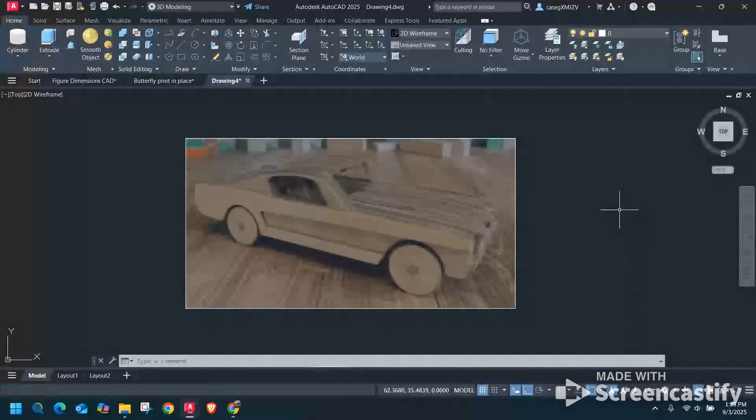Okay, so when you decide on your design, look at it and evaluate it and decide how you're going to create it. You don't have to use every element that's in the design, but you want the overall look. So I'm going to take this profile and I scaled this image after I went to my insert and attach. I scaled the image to be 6 units, 6 inches is what I have it at, but 6 units in length. I don't want my car to be longer than that, and I want my width around like 2.5, 3 inches in width.

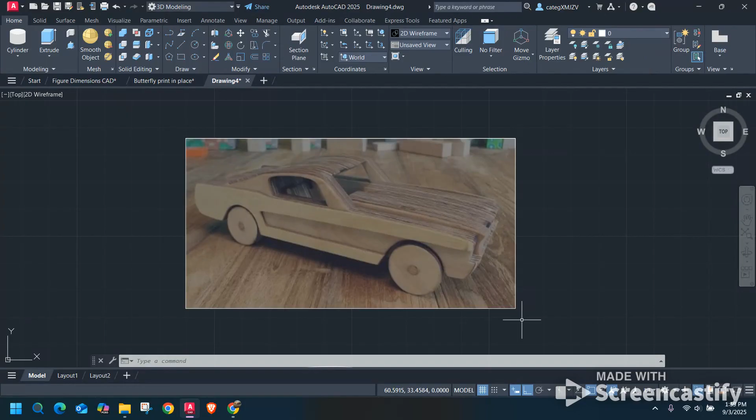If you look at a standard Matchbox car or a toy car, typically you have that foundation. So I started out by just recreating that profile. Now, this is an isometric view, yes. However, you can just extrapolate where you want your pieces to be. I'm extrapolating how far this wheel is back from the front and how far this piece is from the fender, okay? Now, again, this is your interpretation. It's okay to be a little bit different about it. It doesn't matter, but what you need to be doing is utilizing your tools to create it.

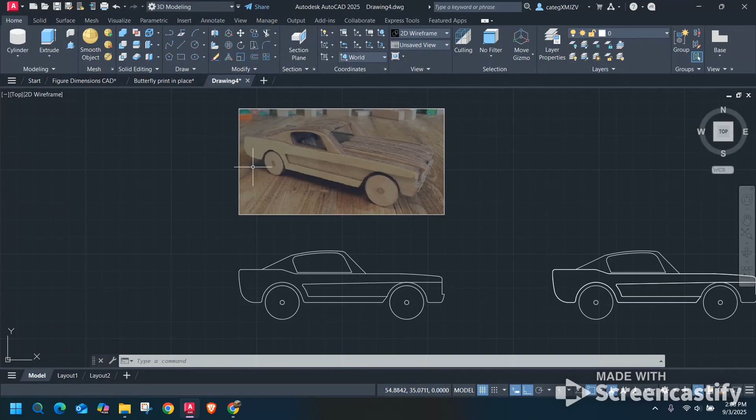So you'll go and just outline it. Now, what I ended up doing was deciding where I wanted the base to be, where I wanted the wheels to lay out in a very simple grid-like fashion that you can go ahead and change as it becomes more and more prevalent in the design. So say these are off a little bit, you can shift them forward or back, making sure your isometric is on until they actually align with how you want it to lay out.

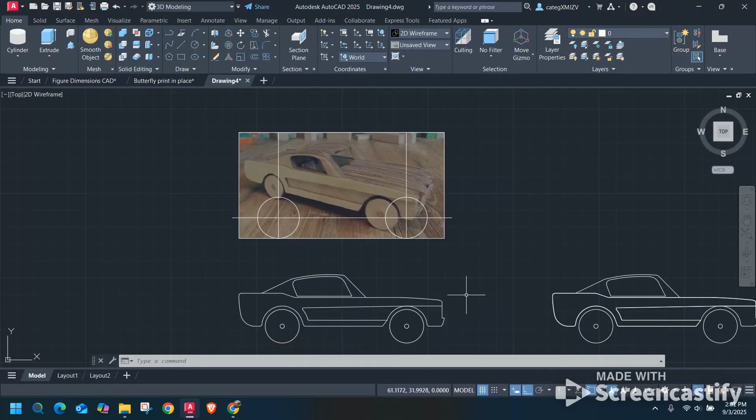Then what I would do and what I did was start with your wheels. So you'll go ahead and you'll start with your wheels first, and then you have a basis to create this opening in the car body, and you can just do that with an offset. Just make the decision on how far out you want that to be, remembering that you're in a 6 by 2.5 body, okay? Also, you need to know the size of your axle, right? So mine is rather small. I just used a dowel. You can use a metal piece. It really just depends on what you have, but you're going to need that to develop your car.

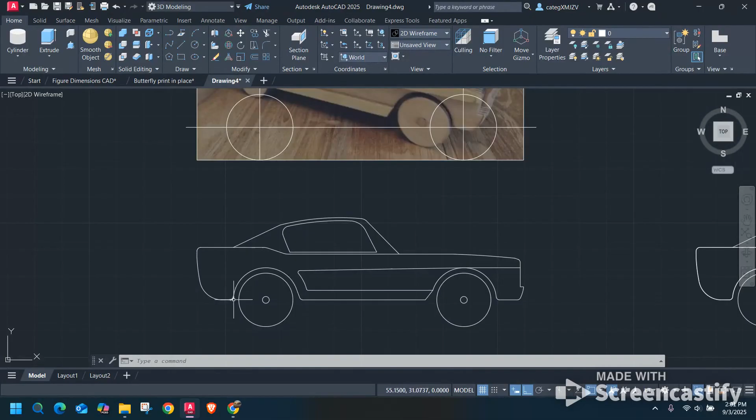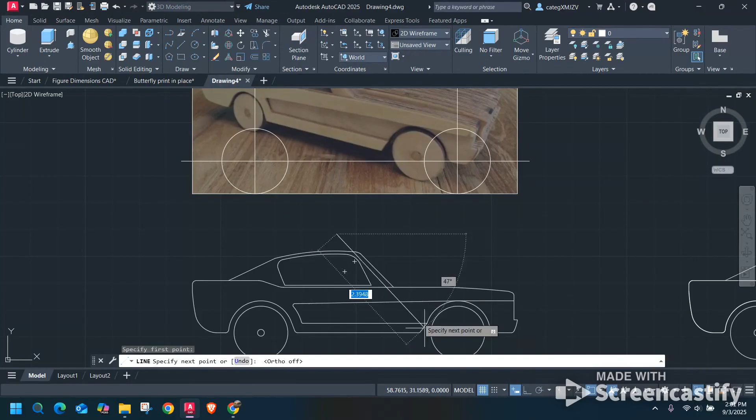So I did most of this with lines and grid work. I did some fillets in here, some offsets. This is just an offset to recreate this portion of the body. If you can see here, it actually does come off of the body a little bit, and I decided to keep that intact. I also wanted this opening to remain intact, so I did create the window. Now, I did that as an offset, but I also decided that I wasn't sure exactly how I wanted the windows to be, so I played with it. I played with the angles. So just go ahead and decide how you want it to look, but use larger lines to set up how it's going to be and how it's going to lay out, and then trim it out. And then once you trim it out, you'll fillet it.

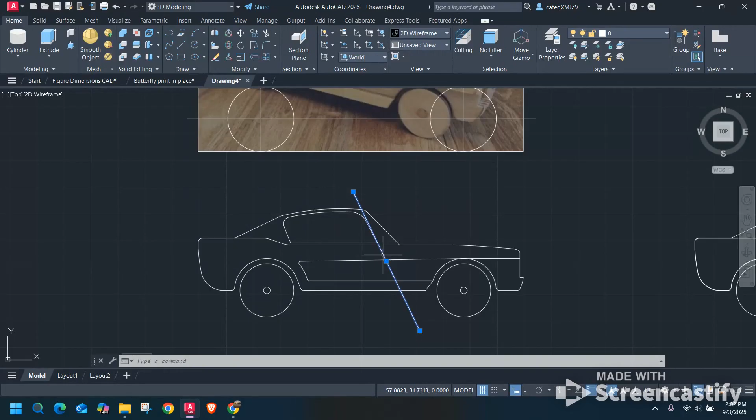So this was originally an offset of this upper piece here, and then I created another line similar to this one back here, okay? Which can just be a simple copy if you want it to be, okay? And then this is, okay, it's not quite where I want it to be, so I'm gonna shift it, okay? Then make your box. This down here is another offset. So slowly but surely your body will come into view. Now you need to make sure that it's joined. You need to make sure you're using your snaps, or you won't be able to press pull it.

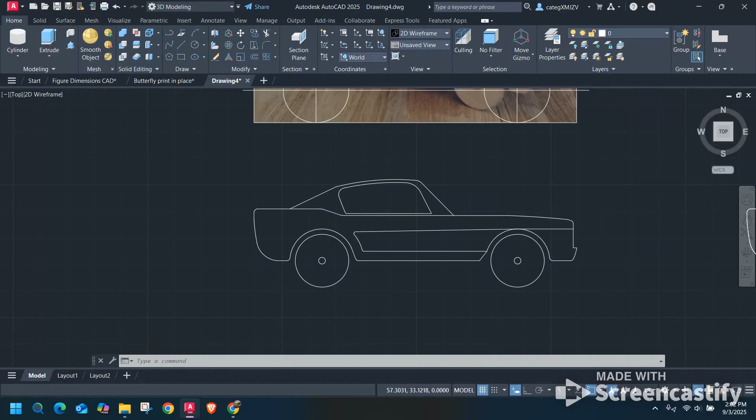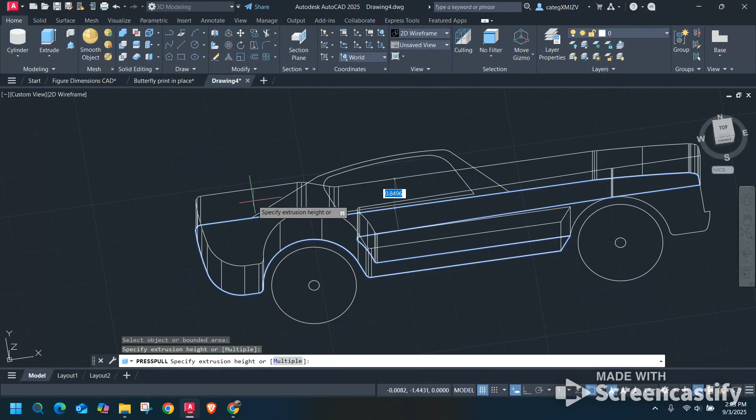So if I do want this outline to be above the main body, I'm going to need to presspull that. So what you're going to do is you're going to press pull this shape. Okay, just go to your press pull and decide how big it's going to be, right? So it's not large, it's very thin. So go ahead and decide if you're going to want it at 0.125. That gives you a little bit of lip, but maybe not too much, okay? So play with it. This is a jumping off point for the design.

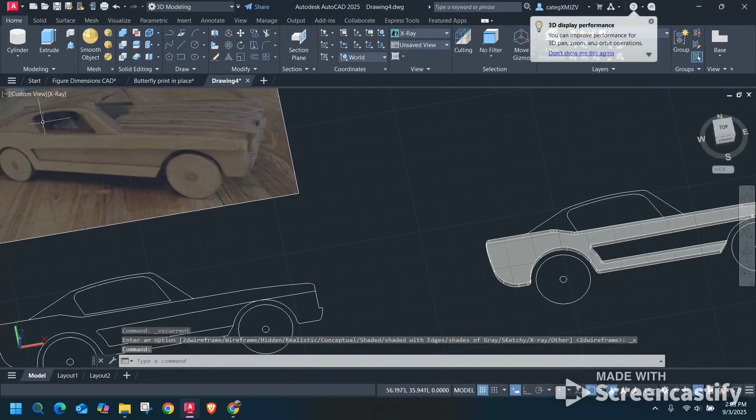So here you have the actual outline of this portion created, right? So I created it, and then I changed and made some little fillets. I can come back later and fillet this all out so it's not a sharp edge for printing. That would look nice. That would develop it a little bit better. But I'm going to leave this here. And then what I decided to do was go ahead and copy my outline so that I could create the body.

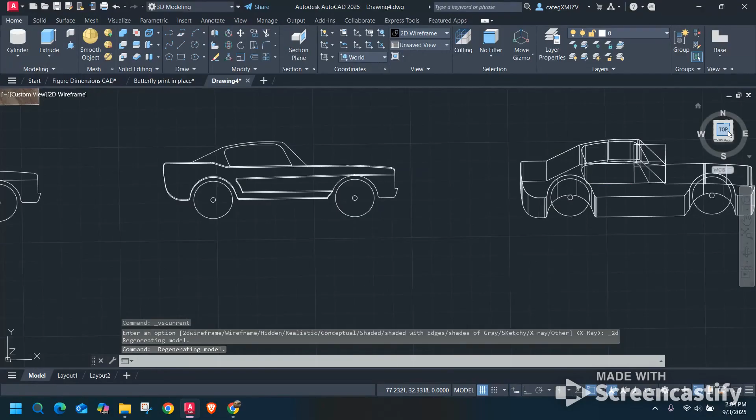Okay, so if we look at this, here's my body. This has now been left over here, and I just took the body with the wheels. So this will be an opening, and I'm going to go ahead and press pull this. Now I press pulled it 2.5 inches, but I went down.

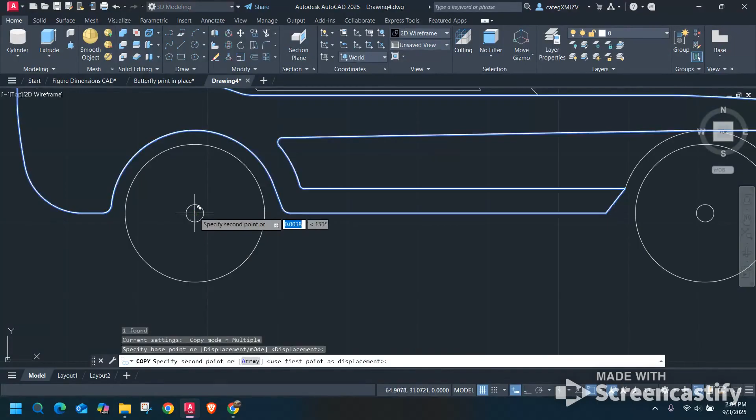So if I look at it from the side, you'll see that this piece is above the plane and this is below the plane. So it'll make it easier for me later when I want to place it on top of it. So if I wanted to do that now, I would select this, copy it. I would use a consistent point of attachment. So I would say maybe the center of this wheel, and then use the center of the wheel I have here. And if I look at it, you can see that it's above the other, okay?

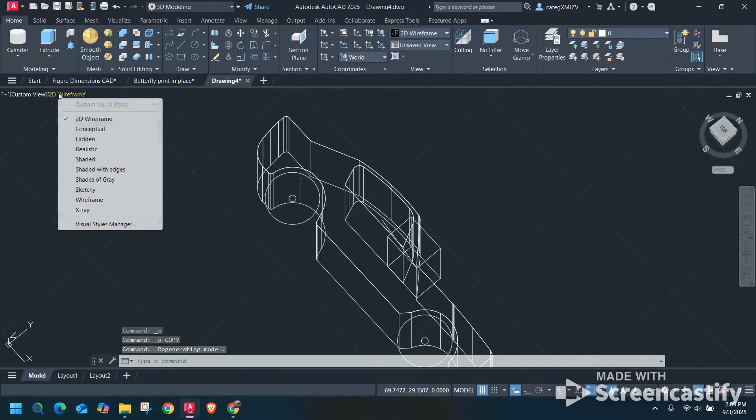I'm not gonna do that right now because I wanna mess with this a little bit more, okay? So we'll go back to where we were before. Now, if you look at this, it has the hole here, but it will not have the hole in the windshield per se. So what you're gonna wanna do is you're gonna make that opening. Now, because we already created this, we don't need to worry about that.

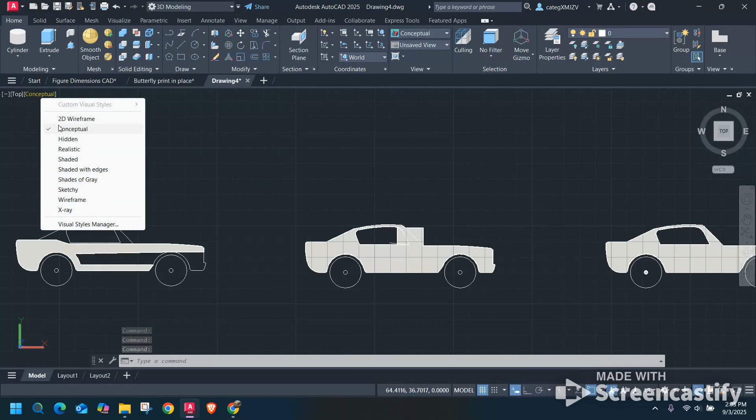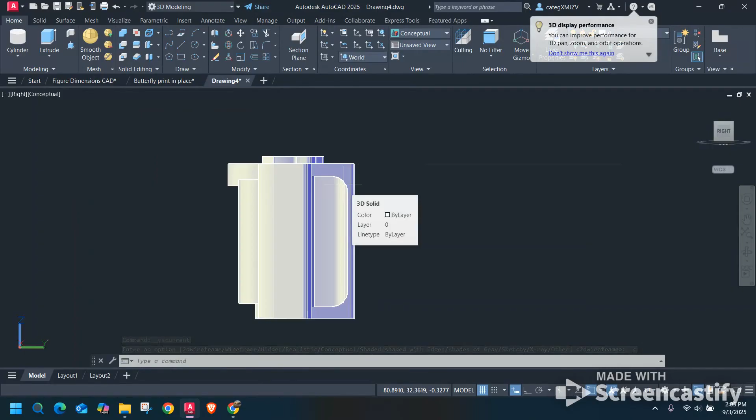However, if you make it with a rectangle, it's going to eat into this doorway because this is not a straight line. So the easiest way to manage it is make your rectangle, decide on where it's going to align with the body. You can see it here. I actually filleted my edges because I didn't want it straight. It does not need to happen that way. I just did it.

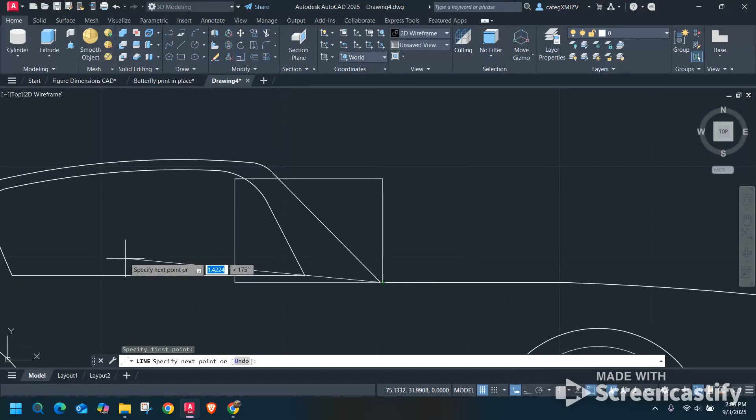And then I'm gonna look at it straight on from the side. And I'm gonna put it back in wireframe to make my life easier. And then I'm gonna decide where I want this sliced. So I'm gonna take a line, I'm gonna stick it down here, and then I don't want it to cut into the hole I created, so I'm gonna kind of bring this line aligned with this little corner piece.

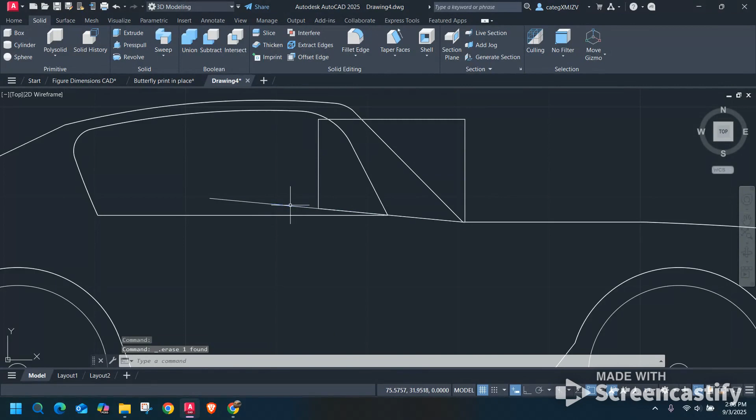Then remember, slice: go to solid, go slice, the solid box, and then pick your plane that you're slicing along. Make sure you get this corner or it's gonna be weird, okay? So then this should be its own entity and it can go away. Now what that's gonna allow me to do is subtract this and create the hole for the windshield. So subtract, I want this piece and I want this piece gone. So now I should have a hole if I look at it in conceptual, okay?

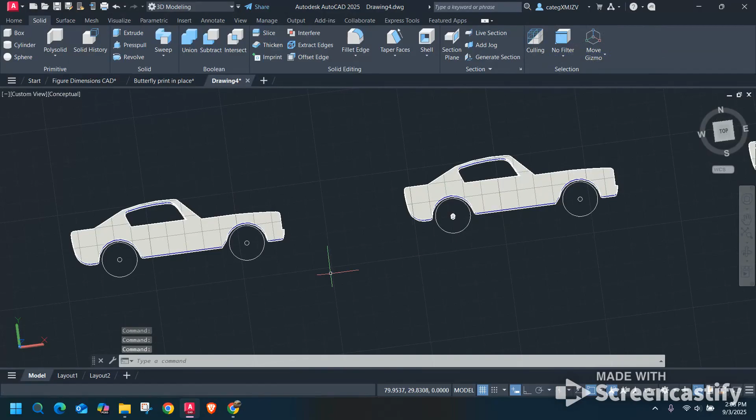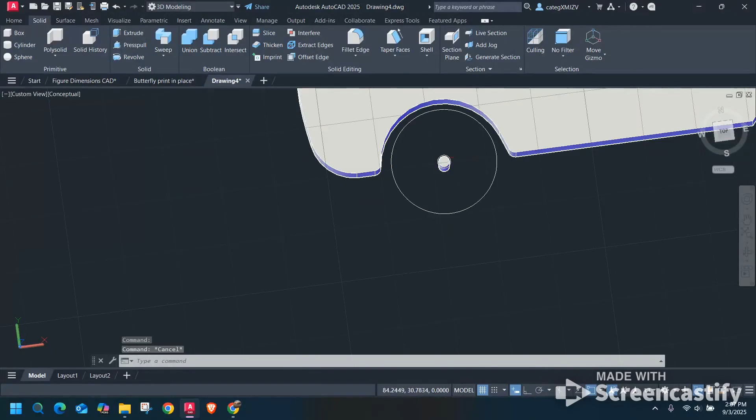Now, I want, before I move forward, to have my axle created. So I'm gonna go ahead and make my axle. The thing about it is, it can't be the same exact size as the hole in the wheel. So go ahead and offset it. You're gonna want your tolerance to be between 0.02 to 0.05. So I'll have that and it'll hang out here for when I need it later, okay?

So the next thing you're gonna do is make the wheels. And I made the wheels without this hole. The reason I did that is because I'm going to turn it later and delete that opening, but I don't want the hole, I want it to look like a solid piece in my wheel. Now, if you want yours to go all the way through and you're gonna put a pin to lock it in place instead of glue, that's fine, you can totally do that. So you would just create your axle and it would come all the way through the wheel and then you would have the hole.

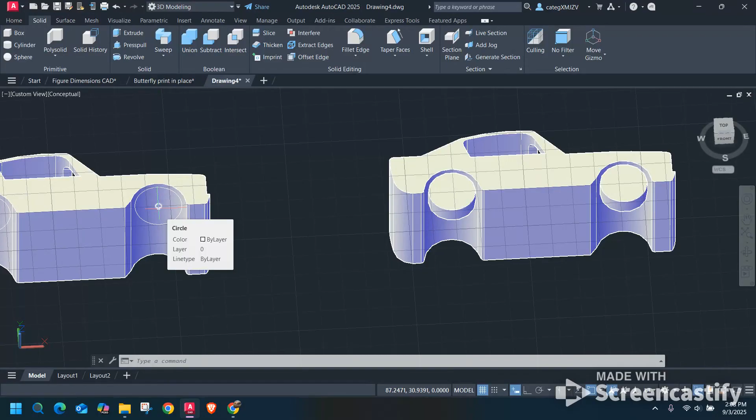So at this stage, I have my body, I have the outline detail, and I have my wheels. Now, with the wheels and the outline, I can flip those with mirror to the sides I want them to be on as an eventuality, okay?

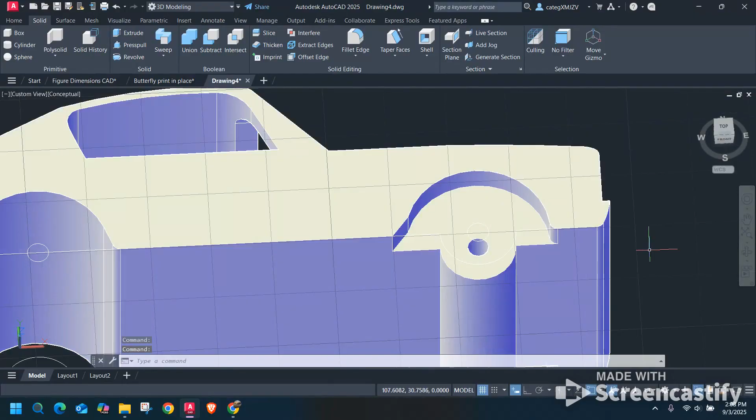So the next thing you need to work on is creating the wheel well, okay? So it needs to be deep enough that your wheel will not interfere with this opening. And remember, if I'm not happy with its depth, I can always use my press pull and push it in. That is not a problem, okay? So I went with 2. The whole body is 2.5. I'm gonna have it at 2. Does it work? You have to look and see if it interferes later on.

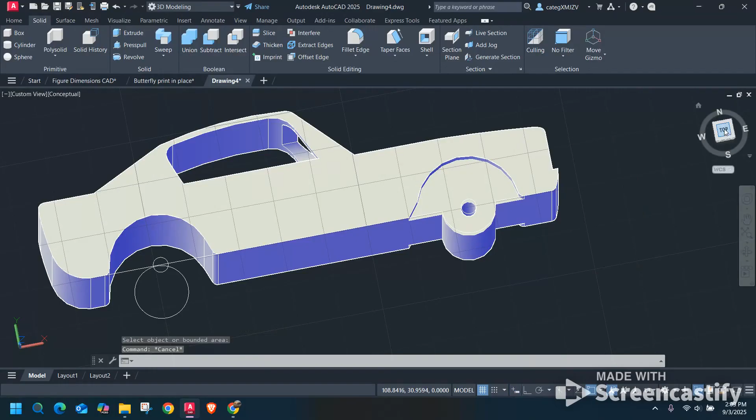So how I created this portion was I just snapped a line across this body to cover the opening. And then I decided on how much of the axle I wanted to have embedded. So I didn't want a flimsy piece of the body surrounding the axle, so I made it a little bit larger. You don't have to. You can go ahead and fillet this and make it a little more attractive. I just left it as a circle with those sharp angles.

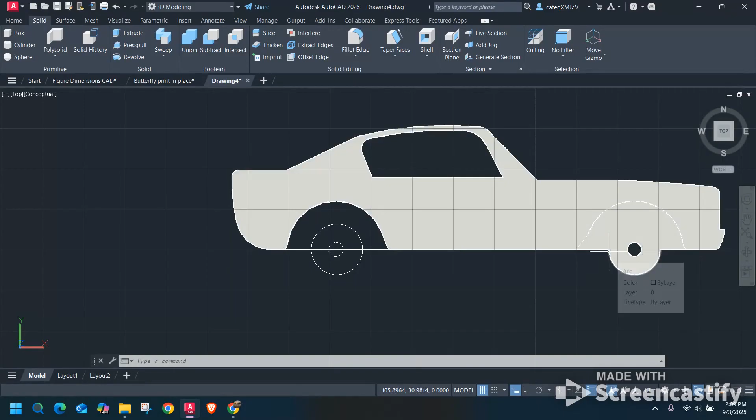So all you have to do is, once you've done your offset for where the axle is going to go through, so remember, you have the hole in the wheel, you have the axle a little bit smaller than the hole, so you can slide it into the hole of the wheel, and then the axle has to slide through this portion of the body so it will rotate freely.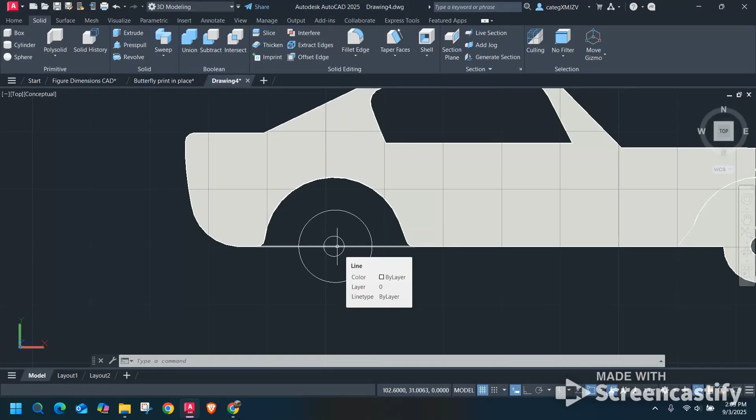So you're going to have to offset that original diameter by enough that you'll be able to slide the axle through. So I would lean towards the larger of the tolerances, maybe 0.05 or bigger, so that it goes all the way through. Now you can always do test pieces to make sure of what you're doing. Once I have all of these pieces in place, I'm just going to trim this out.

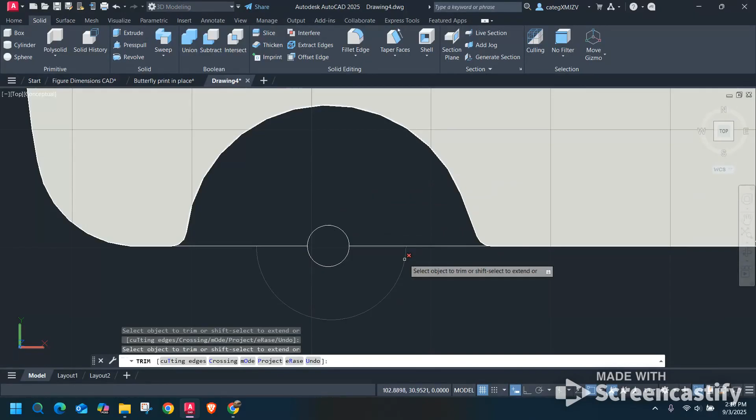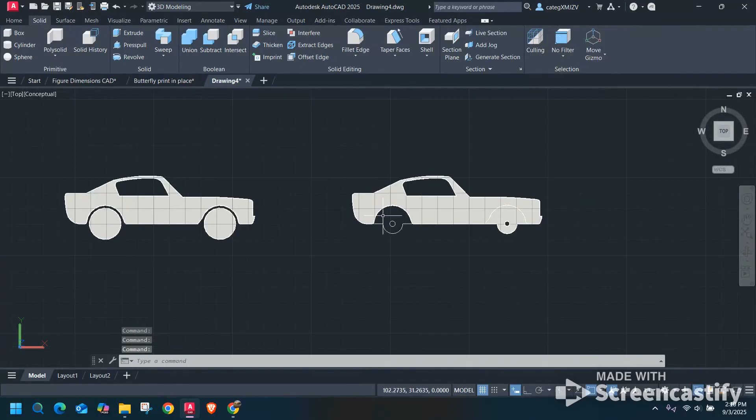That and that. Okay, so it looks kind of similar, and you'll just press pull it. It should grab it. Sometimes, oh, look at that. This is not on the right spot, so just go ahead and move it. Happens to everyone. There. Hopefully this will work out fine here. And now when I hit press pull, hopefully it grabs it, okay? And I want it to go this way, 2.5.

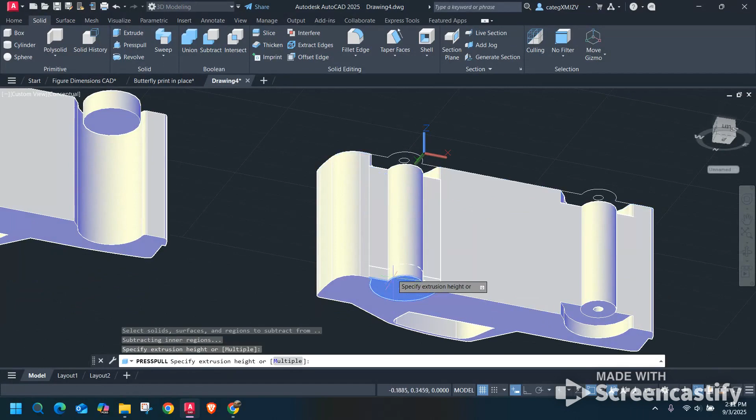And then I'm going to push this in the 0.25 and 0.25. Oops. I think my body is 2.5, so I needed this to be 2, not 2.5 like I made it originally. Okay, so now I have pretty much my body the way I want it to be. If you notice, once I create it, you're gonna have to union it if you want to do any filleting to the edges or any details like that. So go ahead and union it once you have that body in place, okay?

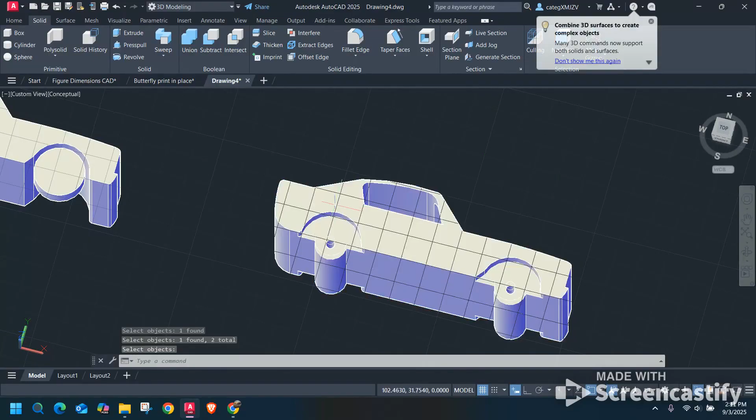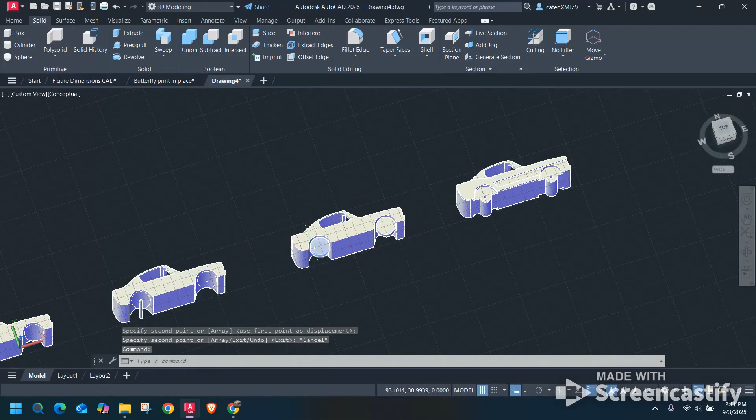So now, you still have a center point for that circle. So if you want to go ahead and put this onto your body, you should be able to if you made it correctly. Now, holding my breath and hoping that I did it right. Okay, and then the wheels should be the same. They should have the same location. I'll put it here, where they set there, okay?

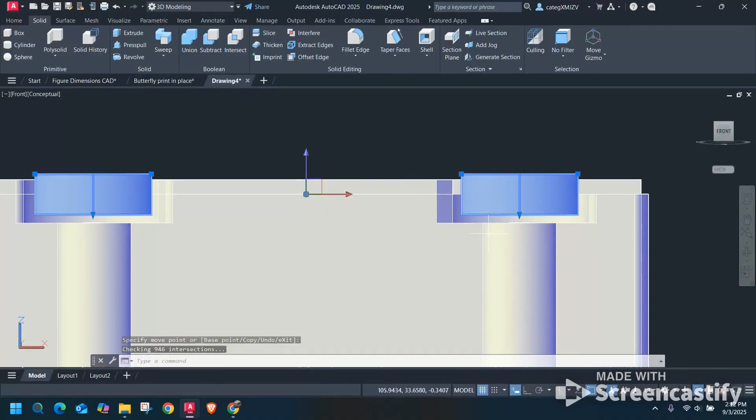Now, one thing is, did I make them too thick? And I did. So let's not do that. We want both of these to pull out from the body. And actually, I guess they're not too thick. I just placed them on the wrong circle. So I'm going to have mine protrude just a little bit from the body. You may need to put in a little separator piece here if you want. I don't want any friction, so I'm going to leave them like that. Okay.

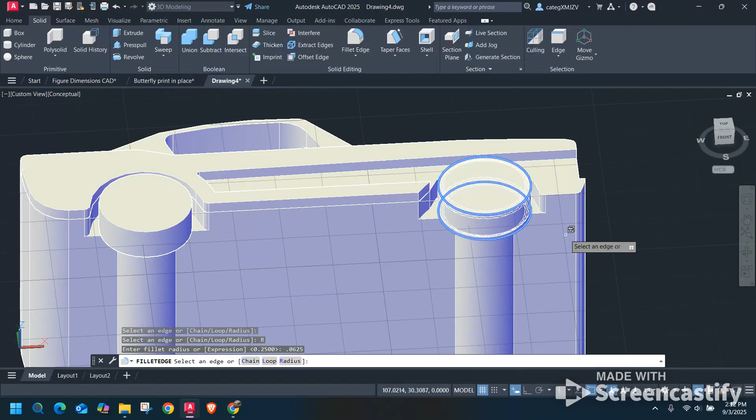Now, maybe we should go ahead and fillet our edges. Okay, that's obviously way too big. You can see that. So just remember, press your down arrow and change the radius. It'll tell you what it is. So maybe we try 1/8. Okay, and if we like that, we can put it on both. Now make these changes before you do your mirror.

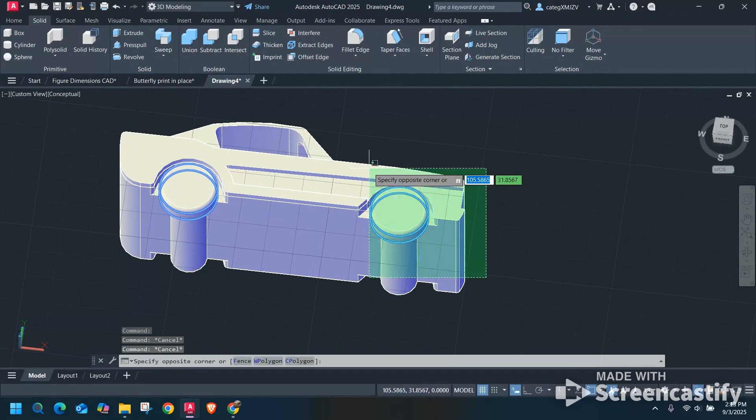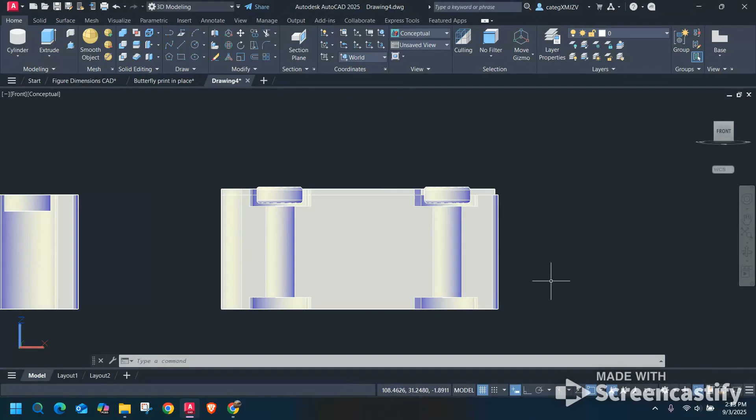Okay. Now, the next thing you want to do is bring this piece and these pieces over, okay, to the other side. So if I select all of these, I look at it from the front, I can't just move it. I want them perfectly placed. So what you're going to have to do is go back home and go to your coordinates and place it on the plane you want to flip it with. Go ahead and change the view. Select everything that's going to move with it.

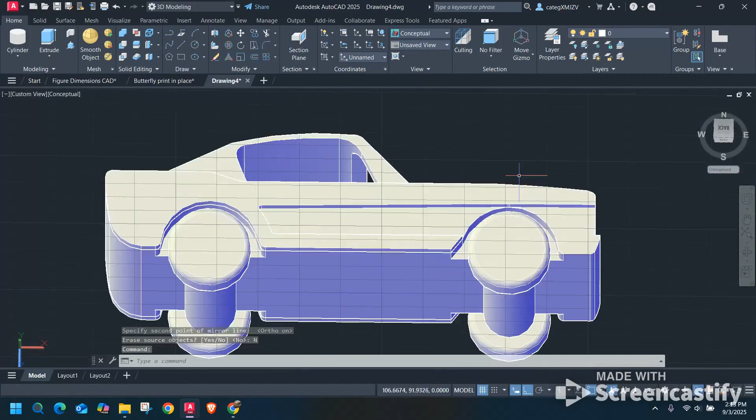Okay. Mirror and find your midpoint. Put on ortho and say no to erasing. So now you should really have your body, okay, and your wheels. And when you go to print this, you're going to want your pieces unioned. So hold on.

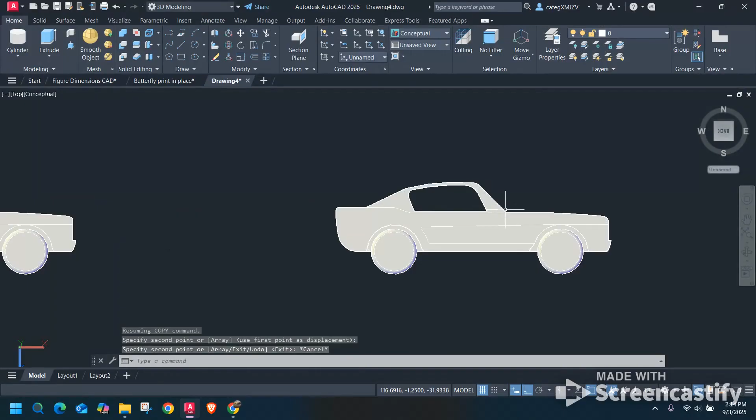A lot of times when I create, I have multiple copies, because I might not realize something I've done is going to inhibit the overall design until after I've already done it and it's saved, and I didn't print it. I didn't do what I needed to do with it, and now I'm kind of stuck. I don't want to be stuck. I want it to be created.

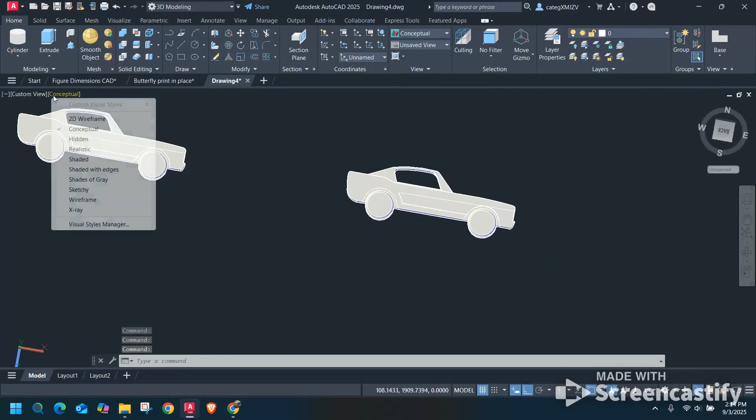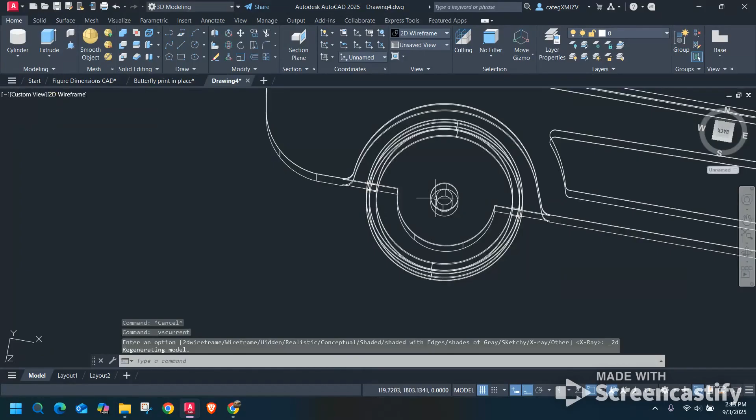So the next thing I want to do is place my axle in, which is here. Oops, not both, just the one. I'm going to copy that. Make sure you grab its center on the right plane, or the right place. Come back to your overall car and place it, okay? Now, it's going to be hard to grab, so you may have to put it in wireframe for that. And I would make sure you get the top one and not the bottom. And again, make sure you get the right one and place it.

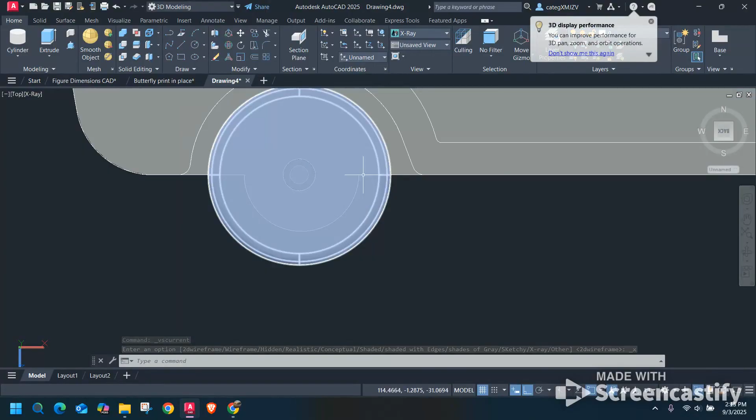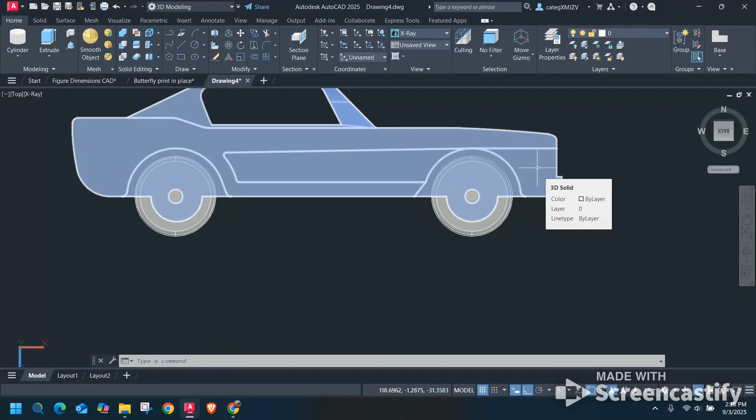Okay, so let's look at it. Now, if I look at this in X-ray, I should see body, wheel, and if I can grab it, there's the axle. And if I type in interfere, if I can spell, if I remember how to use interfere, do not interfere. See that? So it's not like union where you select both objects. It's select the one object and then which does it interfere with, X or Y.

Now you'll have to hide the wheel, right? So say you do isolate and hide both of them, so you can check the axle. And then you'll have to hide the car to do the same with the wheel. But that's your car. So then what you'll do is leave it on this plane, and I'll show you how to do just the one.

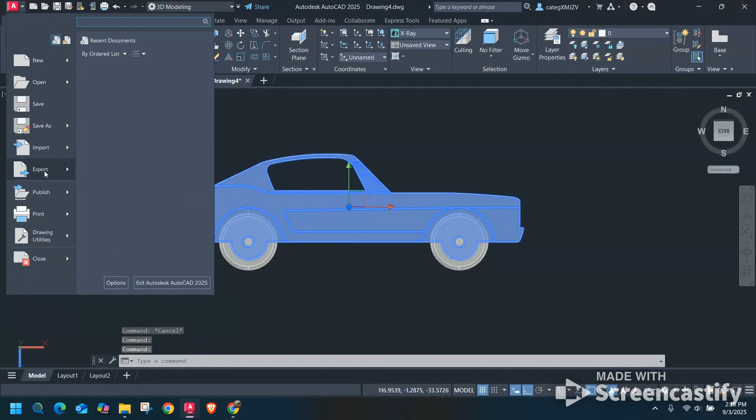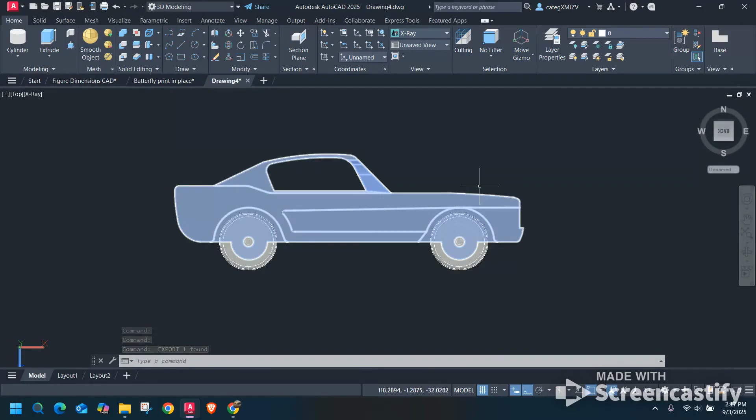So if I select this and I go export, other formats, and see it's already a stereolithograph. So I would say car body, you can name it whatever you want. And save it. Now, it's going to be there as a stereolithograph. That's the file you're going to use. Okay, so go ahead, develop your own. Make sure you don't have any interference. Make sure you're developing it correctly. And that will be your project.